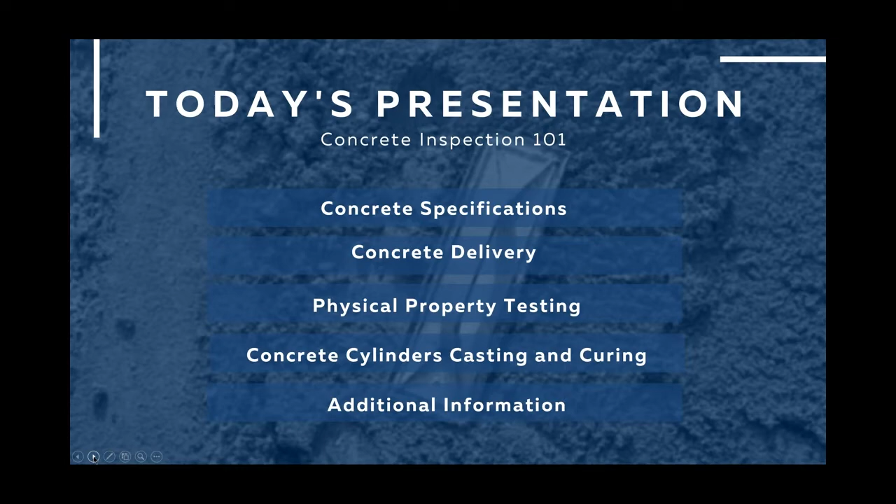So first we're going to start with concrete specifications. Next slide. All right, so just a little highlight: El Paso County follows CDOT, which is more of a performance-based mix, where the mix can be done however, it just has to have the desired results. Whereas the City of Colorado Springs follows more prescriptive style concrete, which means we put together how we want the mix to go and accept the results as they are done. Next slide.

So if you're doing work in El Paso County, you utilize CDOT's approved mix designs list, which can be found on CDOT's webpage. Predominantly, you would use a Class D or P mix for paving, structures, curb and gutter, etc. And then there's a BZ mix that you would use for drilled piers.

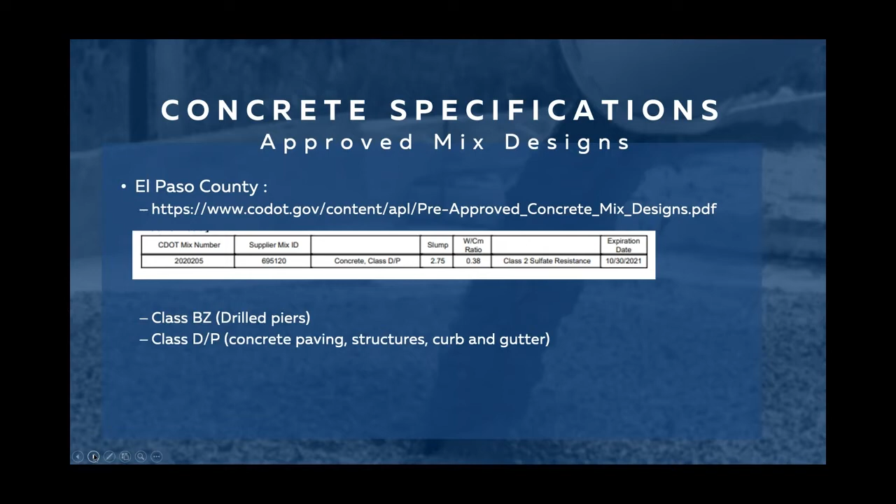The City of Colorado Springs, for almost everything you do, you would be utilizing our approved mix designs, which are available on our website. In general, it's just called the City Mix. That is available on the website if you guys need it.

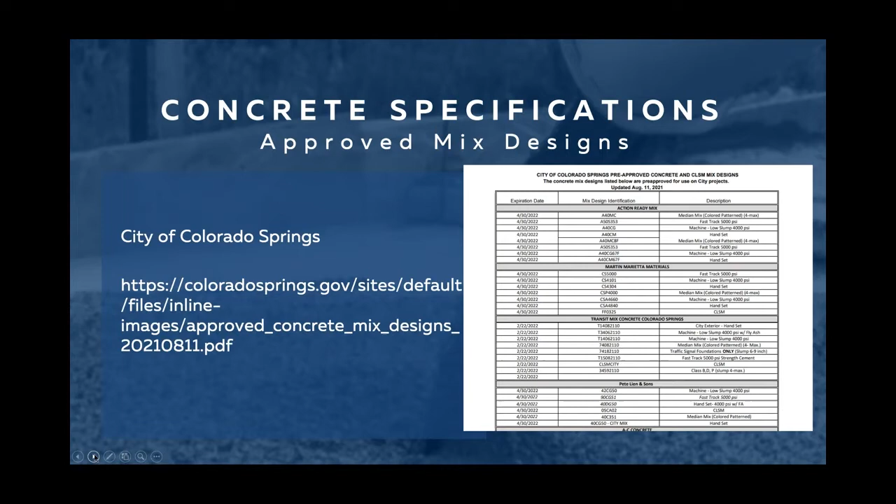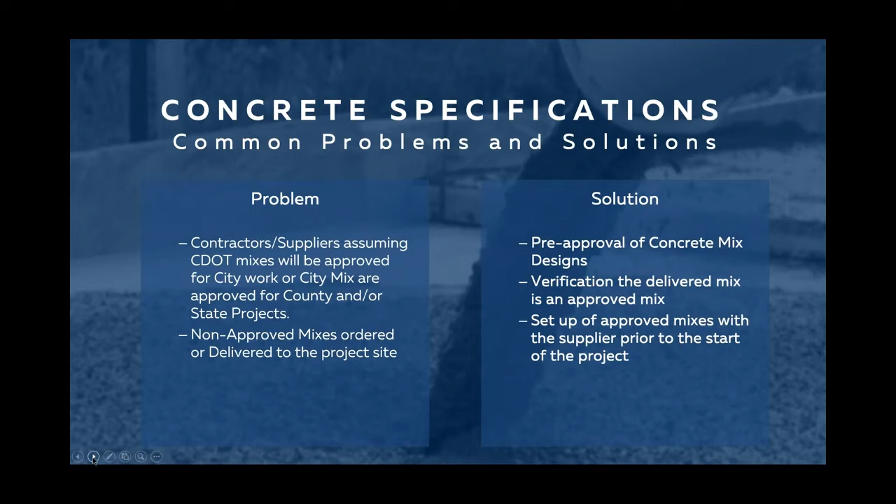Common problems and solutions: oftentimes we have problems with contractors or suppliers assuming that the mix can be used for whichever job site, often confusing city and county mixes, especially near the borders. Sometimes contractors or suppliers provide the incorrect mix for the job. So it's really important to make sure you know what the pre-approved mixes are for your project, verify what is being delivered, and take a moment to set up with the contractor and the supplier to confirm what mix should be delivered to the job site.

And with that, I think it goes to Jason for concrete delivery.

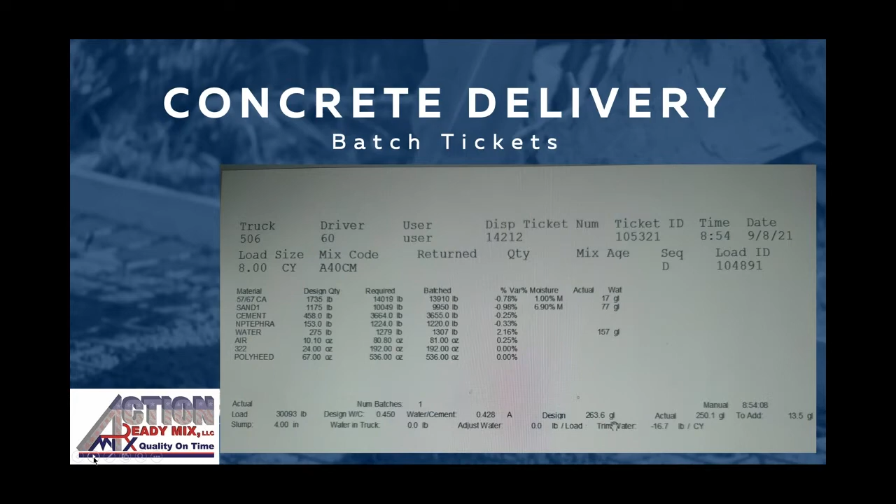So I believe it goes next to Pete Lien. Yes, good morning, this is Joe Grego. I just wanted to address basics, again similar to Jason.

If you look at the left side of the screen, the batch ticket information highlighted in yellow, starting from the top working down, you have your ticket information, your batch time, the date the load was requested, the slump it was requested at, the truck number, and below that the amount of yards in quantity per load, a brief description of the mix design, and to the right of that the product code 40C351, which is the actual mix design that is going to be placed for that day.

On the right side of the screen, that's our batch weights, which are on the back of the ticket. The top line summarizes the truck number, the time it was batched, and the date it was delivered. The second line is the amount of yards being delivered, and then the mix code to the right of that. The key important number is in the fourth column, highlighted in yellow, which is the cementitious material, and they will use that along with the actual number at the bottom where it says actual, highlighted in yellow, 149.6 gallons.

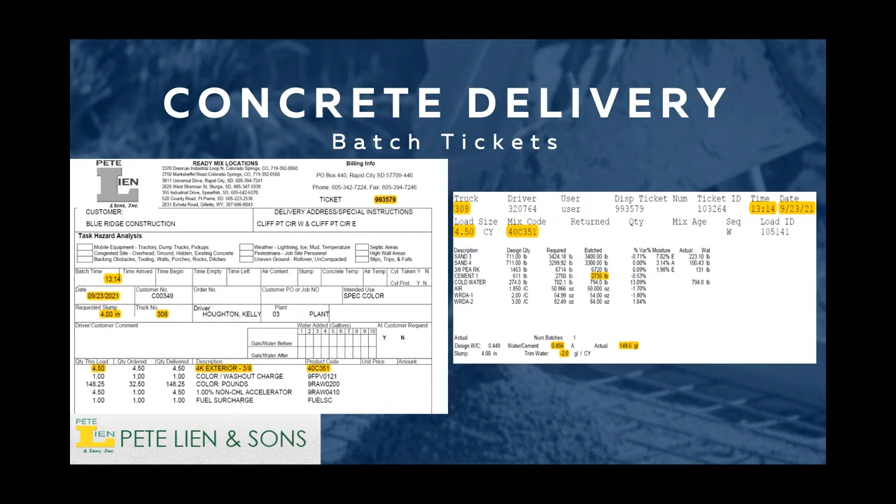They can use that to verify the water cement ratio, which is located to the left of that on our ticket, which we place for everyone's convenience to make it easier to use. And with that, I think I will go to the next slide and turn it over to Don. Thanks, Joe.

So what you're looking at here is a pretty standard Martin Marietta batch ticket.

One thing to note is that batch weights are not automatically printed on the tickets and are typically printed upon request. In the event that you've forgotten, or down the road you want to see them, you can always request them from your sales representative or the dispatch.

Going over the ticket, starting at the top, it's not highlighted, but it is important that you verify that you are the correct customer, of course this one being RME.

As we move down the ticket, you see your mix code, in this case being ZA4115SP, and a brief description, 4,500 PSI exterior. Further down, you see it's a 10 cubic yard load of concrete. This customer ordered 110 yards, and we've at this time delivered 100 cubic yards. The slump at the tail end of the left side says what was ordered is a 6.5 inch slump.

As you look at the batch weights on the right, you'll see a list of all the components in the truck. The key thing to take away is the highlighted portion saying water to add, in this case 12.1 gallons. This is the water you're able to add to the truck and still be within the design water to cement ratio. If you dig into the ticket more, you'll see the variance column. Those are determined by C94.

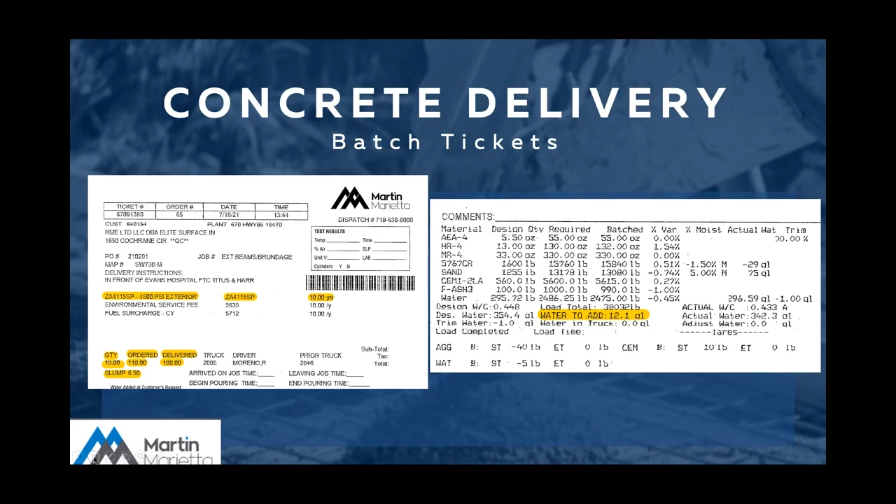We have a pretty tight window on what we can actually put in the truck, and the tolerances are there. Further right, you'll see the actual water cement ratio at the top, being 0.433. With that, we will proceed. Thank you.

Nina, who's our next speaker? Sorry about that, I was still up. Sorry, I was muted and couldn't unmute myself until I got out of presentation mode. The next speaker is Matt. Yes, sorry Nina, I was also muted still. I'm Matt Schaefer with Transit Mix.

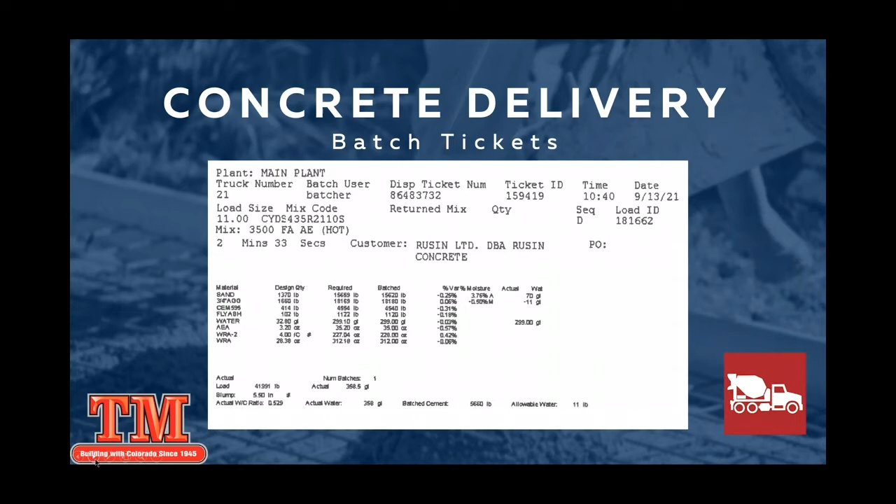Next slide, please. Let's run through some quick numbers, using the numbers from that previous batch ticket. If we had cement at 4,540 pounds and fly ash of 1,120 pounds, our total cementitious would be 5,660 pounds. Going back to that previous batch ticket, we had 299 gallons of water, which is 2,491 pounds.

We had free water, and if you remember, we had 70 gallons of water associated with our wet sand, and we took 11 gallons of water out that was associated with our absorptive aggregate. That left us 483 pounds of what's known as free water. That total water content in this mix would be 2,974 pounds.

When we look at our total cementitious content, just to differentiate, the top slide says water cement ratio. When we start adding natural pozzolans or silica fume or fly ash, those type of components, you go from a water cement ratio to a water cementitious ratio. So our total water cementitious ratio would be our 2,974 pounds of water divided by that total cementitious of 5,660 pounds, leaving us a water cement ratio of 0.53.

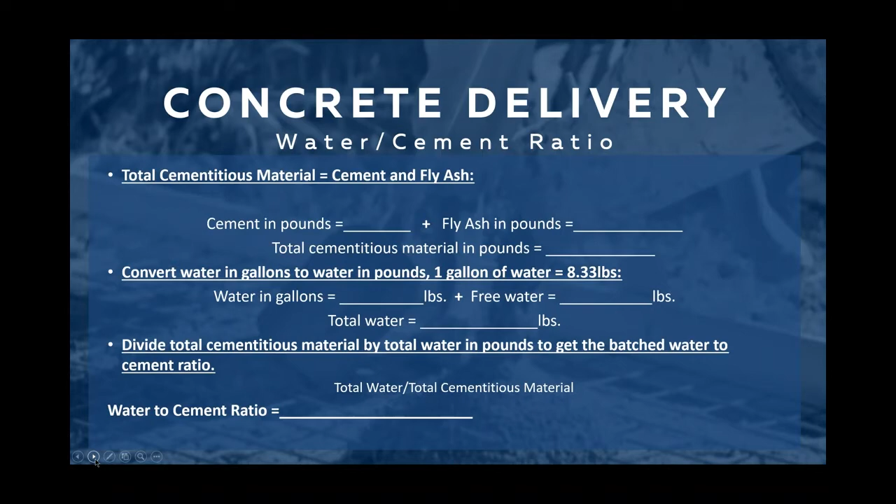Thanks, Mac. Okay, so here we're going to be going over concrete delivery in general, dealing with some of the components on the truck that need to be paid attention to once the concrete's delivered. If there's to be addition of water once the truck hits the site, you need to adjust slump, and pay attention to revolution counts, and any other truck concerns you may want to keep your eyes out for when the truck shows up on site.

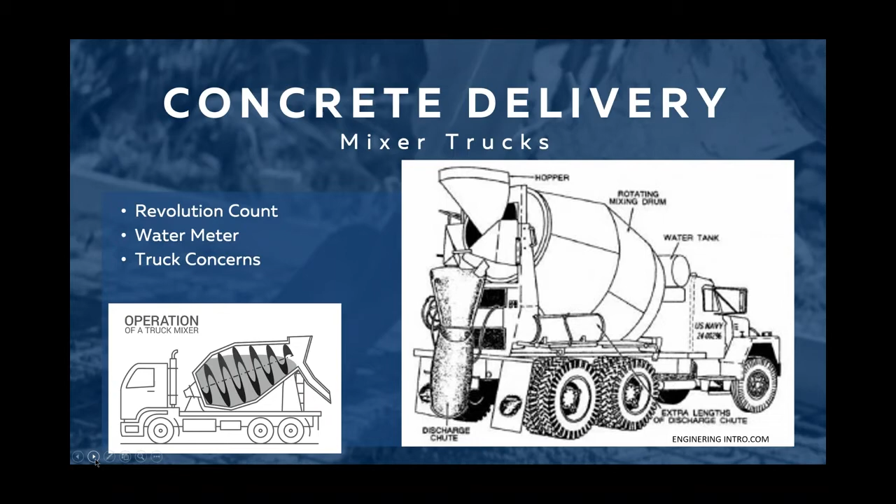Upon delivery, you want to see about 70 to 100 revolutions. You want to look at that to be ensured that the load wasn't beat up on the way to the job and heat up, so that it doesn't start hydrating too fast on you.

Anytime there's an addition of admixture or water, there should be a minimum of 30 revolutions on that mix after that addition to make sure the homogeneous mixture is attained and the air and water is allowed to mix completely through the entire load. You don't want to add water and put 10 revs on it, because then you'll see the top end of that load will be wetter than the tail end of that load.

And as far as end of placement, you don't want to exceed 300 revolutions. That's based off of ASTM and ACI standards. Next slide, please.

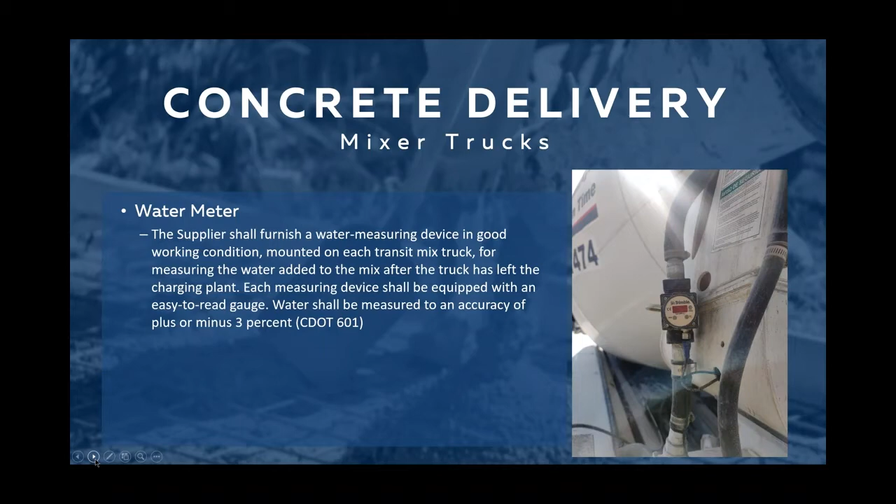Next slide. And then one big thing with delivery, as far as mixing, I know with our plant, we run dry batch plants, and this is extremely important for us, but still important for even central batch plants, is the cleanliness of the drum on the inside, the buildup on the fins. Those fins are meant to mix that concrete and get it uniform and homogeneous and make sure everything is mixed properly and you don't have any segregation.

If you've got a bunch of buildup on those fins, you're going to have several problems, from a uniform mixture when mixing to difficult discharge. And a lot of the times we'll see big cement balls, and that goes back to the mixing. So you want to make sure that if you're adding water or mixing it up and something looks weird, take a look at those fins, or have the driver take a look and make sure they're clean.

Another thing to look out for is the product valves that shoot water into the loads for additional water. Sometimes they'll have a lot of buildup on them and it'll take forever to add water that way, or they'll be leaking. If they're leaking, it could leak water the entire time through the pour or in transit to the job, and that could cause loads to show up too wet.

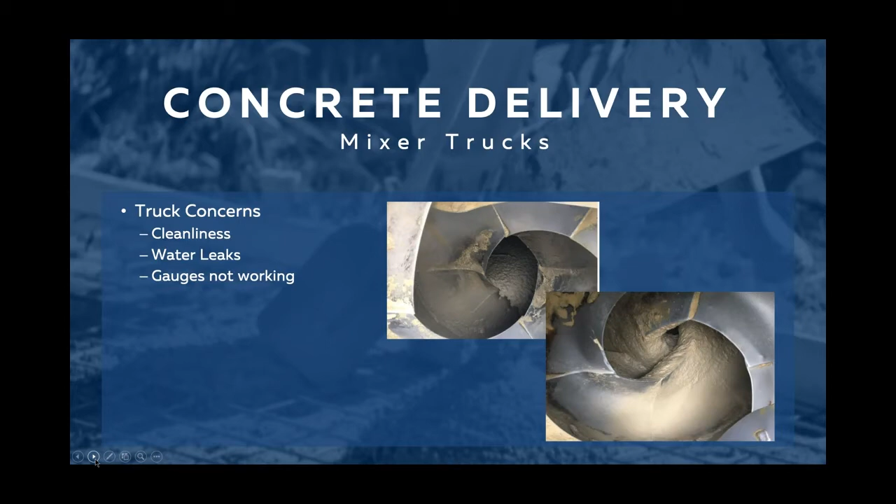Next slide. And then some common problems we see once the truck and load gets on site: no batch weights provided if requested, especially on spec work like city work or CDOT work. If no batch weights are provided, your only option is really to reject the load if the weights can't be supplied in a timely manner.

If there's time left, we've run into some situations where we forget to send the batch weights. Some inspectors will take pictures sent to them of the batch weights, others won't. That's completely up to the inspector on site. Another issue is sending the wrong mix.

Once you verify what mix has been sent to you based off the delivery ticket or the batch weights, if it's the wrong mix or wrong application, reject that load.

Over the time limit, same deal. There's really not much you can do about that. There's a time limit set of 90 minutes.

And if you break that 90-minute barrier, then reject the load as well. Same with over water cement ratio. Once you've broken that water cement ratio, there's concerns of strength, cracking, increased permeability, so you'll go ahead and reject the load as well.

Now, when it comes to low slump, high slump, or high air, low air, adjustments should be allowed on site. Say you've got low air, you need to add air. There should be a one-time adjustment for a retest. If you still don't meet it, then reject the load. High slump and high air, same deal.

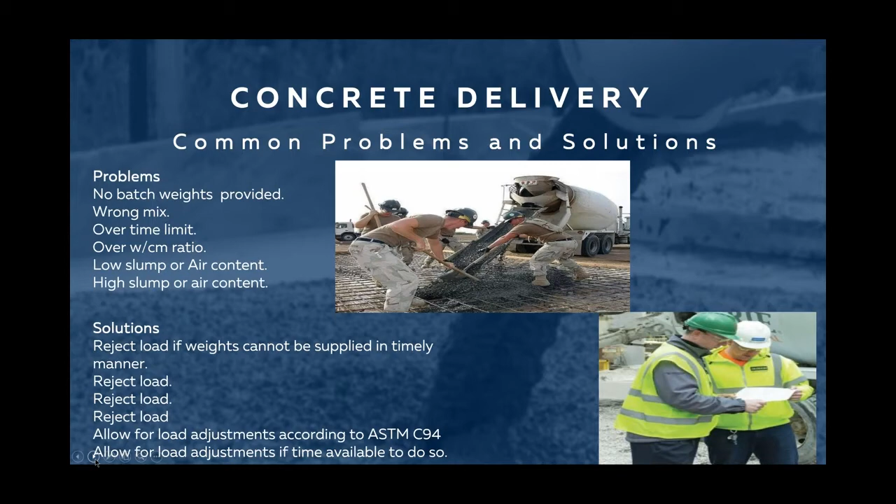I know as a QC person, we have plenty of tricks we can use to try to get that load to come back down where we need to, as long as there's enough available time and you're not breaking that 90-minute time limit. And I think now I turn it over to Don.

We're going to talk a little bit about the physical properties and the testing of concrete now, and I'm going to start with sampling concrete. Next slide, please.

Proper sampling is governed by ASTM C-172. Next slide, please.

Some of the important things about sampling, and probably the most important thing, is if a proper sample isn't collected, and we don't actually have a representative sample of what's being delivered, every other test beyond that becomes invalid. So if we've done things that don't represent the true mix, your air is probably suspect, your slump is suspect, every other test afterwards becomes suspect.

So that being said, how do we get the most representative sample? Because ultimately, every producer in this meeting today wants one thing, and that's an accurate representation and an accurate reporting of what we're delivering to a job site.

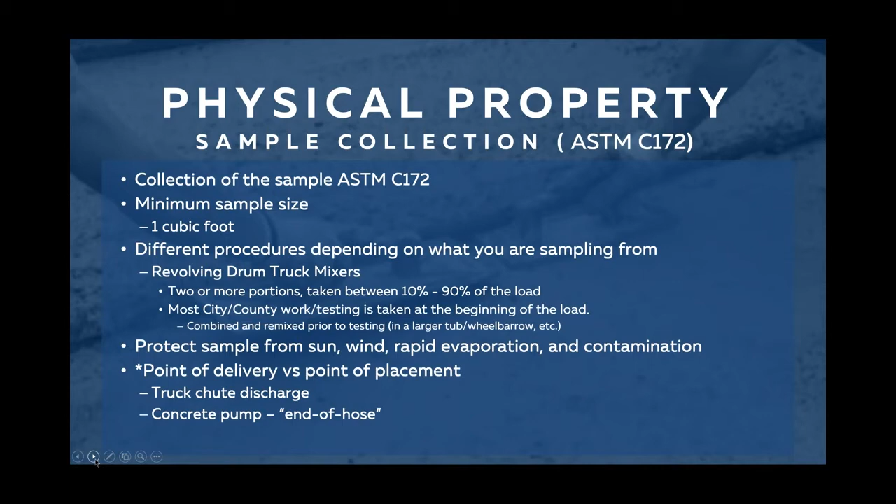Next we're going to talk about temperature. Seems like a pretty straightforward subject. One thing we are seeing more and more of is folks with laser guns or that type of equipment for measuring temperatures. Those are not acceptable for accurate readings for concrete. To get an accurate reading, you have to have at least 3 inches of concrete around the probe on your thermometer, on the bottom and all sides.

So the easiest way to do that, if you've got a receptacle, mound your concrete up so you've got 3 inches on the bottom and all sides. Poke your thermometer down in, then compress the concrete back around that probe so you don't have any air around it. Make sure the thermometer is in there a minimum of 2 minutes, not more than 5, and take your reading and record it while the thermometer is still in the concrete. Don't pull the thermometer out and then take your reading - you need to take it while the thermometer's in the concrete. We report to the closest 1 degree Fahrenheit.

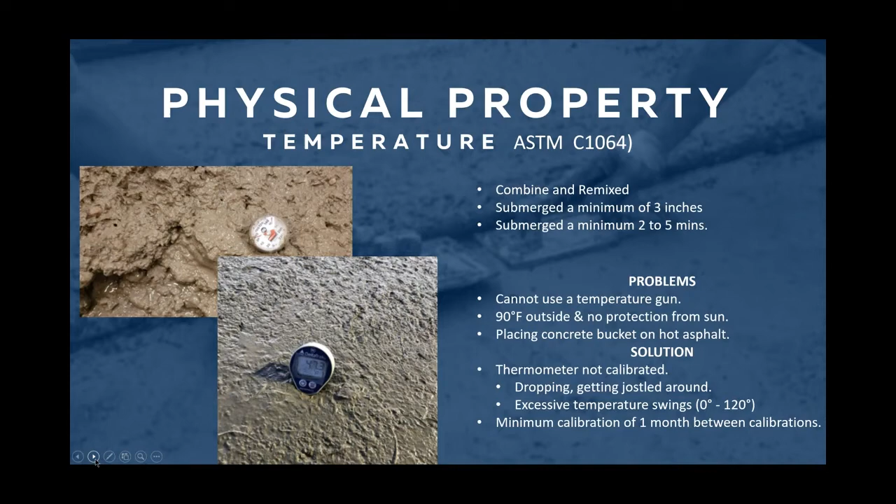Okay, thank you Mac. I think this slide is a video - am I correct, Nina? Yep. And we're going to watch it so we can see how the presentation, the actual test, is supposed to take place.

Here they are taking their thermometer - I apologize, I thought there was audio to this. Should have it embedded at a minimum of 3 inches in. I think our setting got undone, so I'm going to unshare my screen and reshare so we have the audio. Okay, thank you. My apologies to everyone, we do have technical difficulties in this day and age still.

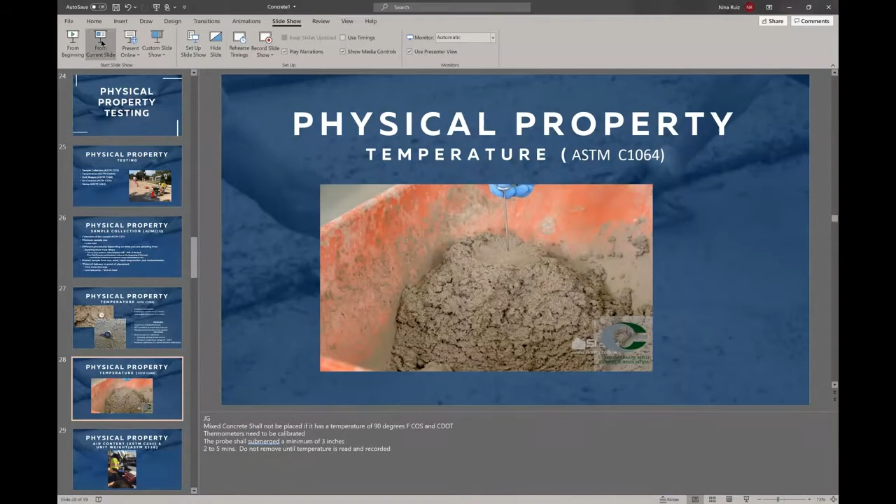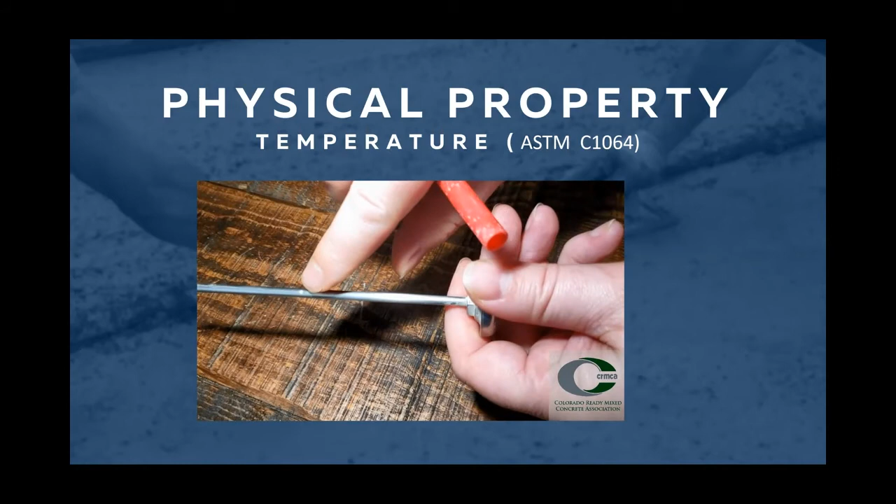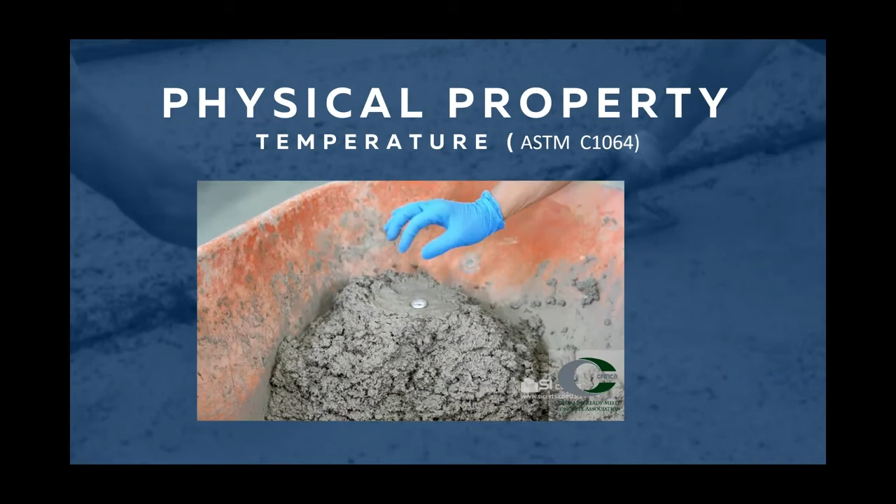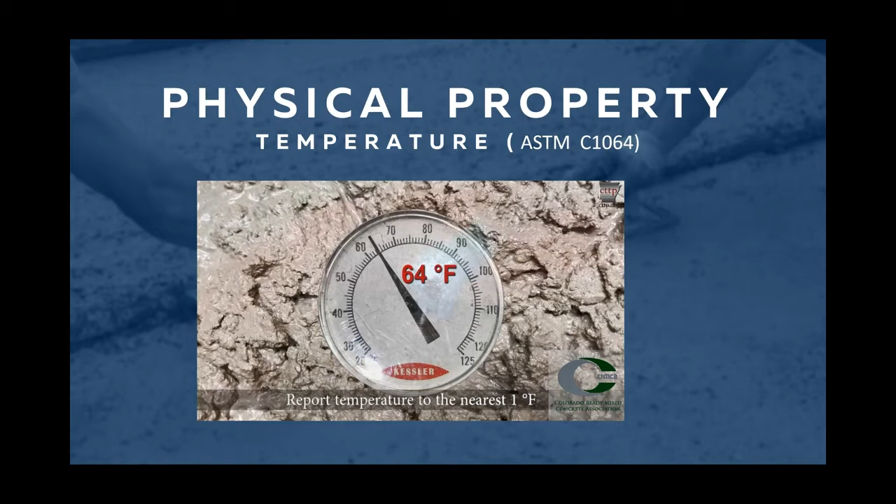Place your thermometer into the sample, making sure there's 3 inches all the way around, including below the probe sensor. Know where the sensor is on your thermometer, as some are at the center of the probe, as shown here by this dimple on the one that I have. Once in the concrete, gently press around the thermometer to close any voids and keep ambient air from influencing the temperature. Leave the thermometer in for 2 to 5 minutes. Once you are ready to read the temperature, just read it - don't take it out, don't twist it, just don't mess with it. After you read the thermometer, remove it and report to the nearest 1 degree Fahrenheit.

Okay, next slide, Nina.

This is just a picture of a young man performing a concrete test. One of the key things we want to address while talking about physical property testing - he's getting ready to do an air content and unit weight test. The same sample of material can be used for both the unit weight test and the air content test. The key things we need to address are that the pot has to be filled in 3 equal lifts. Each lift should be rodded 25 times. Each time they add concrete to the previous lift, they should penetrate approximately 1 inch. They should consolidate each lift, tapping it with a mallet 10 to 15 times. In the event you have concrete that is 1.5 inches or less, sometimes you may have to tap it more than that to get the voids to close.

They should fill the concrete level to just over 1/8 of an inch above the top of the rim of the air pot. The reason they specify 1/8 of an inch is because if you overfill it more than that, you can influence the unit weight by adding more aggregate and cementitious material, and those tend to be heavier, and it can affect your weight by up to 2 or 3 pounds.

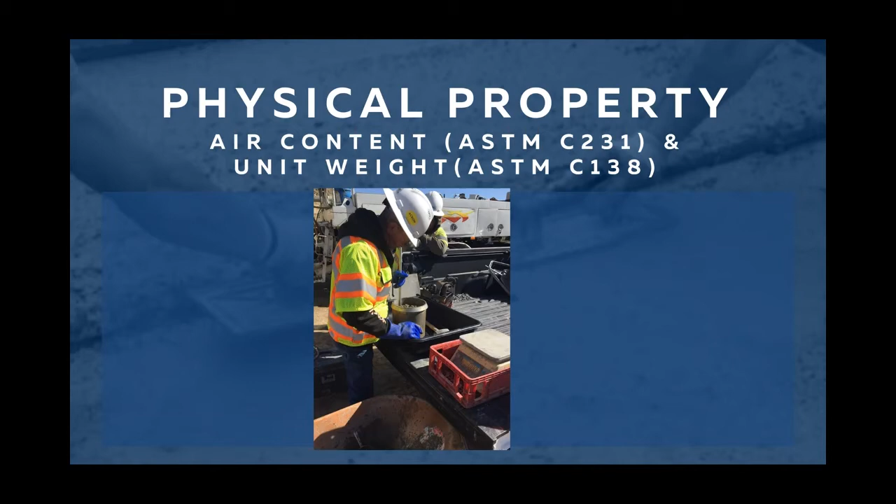If you fill it to that 1/8 inch over, you remove the concrete with a strike-off plate, following the proper ASTM procedures, to make it flat. We'll show you that in the next couple of slides. You clean the rim to create a watertight seal, you weigh the sample, and then you perform the air test. If we can go to the next slide, Nina.

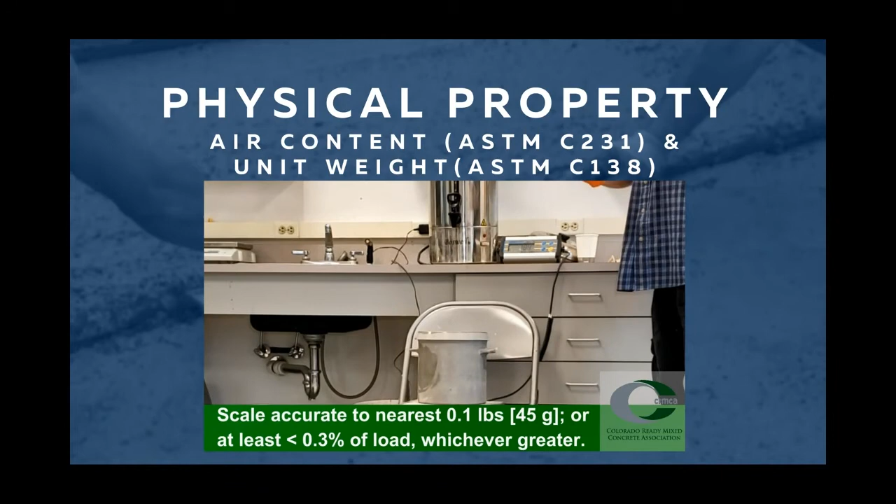Here's a video of the procedures I just talked about. Weigh your pot. The scale should be set on a flat, level, firm surface. Place the pot on a level, flat, firm surface and fill in 3 equal volumes.

Fill the first lift about 1/3 of the volume. Rod the first lift 25 times, uniformly across the surface cross section. Tap the sides 10 to 15 times with a mallet to release the air pockets and close the tamping rod voids.

The second lift gets filled to 2/3 of the volume. Rod again 25 times across the surface cross section, penetrating into the first layer about 1 inch without stirring. Then tap all the sides of the pot a total of 10 to 15 times smartly.

Fill the third and final layer the last 1/3 of the volume. Avoid overfilling. Rod the final lift 25 times, again across the surface area and penetrating the previous second layer only 1 inch without stirring. Tap all the sides of the pot 10 to 15 times smartly, again to close the voids.

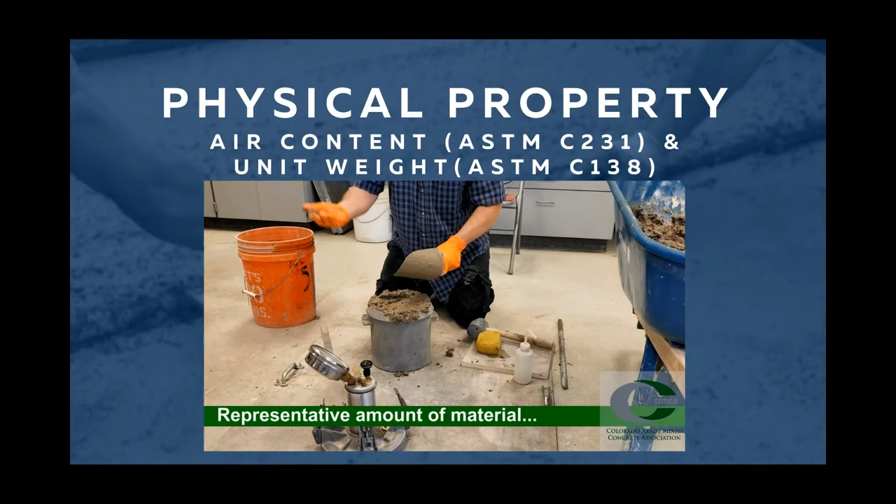A representative amount of material can be added or removed at this time to reach the optimal level. Additional rodding or tapping should not be performed after adding or removing the material. Using the strike-off plate, the top surface should be finished smoothly.

Press the plate flat onto the pot to cover 2/3 of the top surface. In a zigzag pattern, pull the plate towards you until the entire plate is off the pot, keeping the plate flat the entire time.

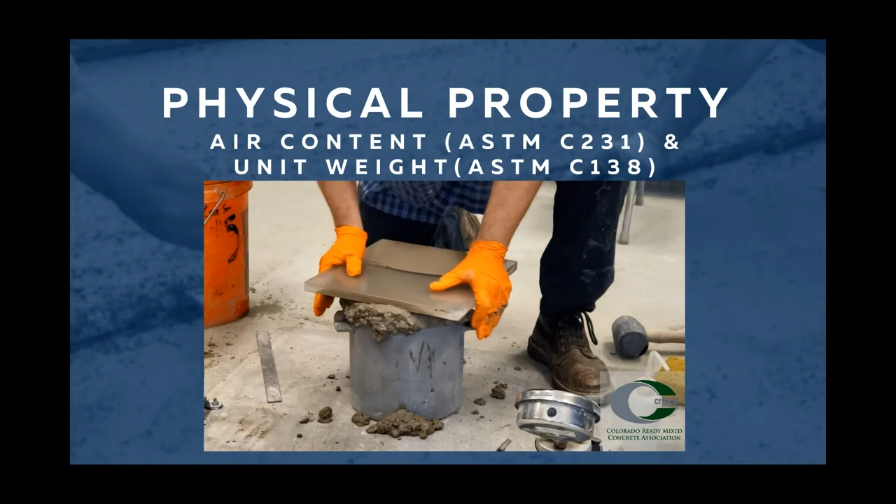Then place the plate to the original spot covering 2/3 of the top surface, and again in a zigzag pattern, push the plate away from you until the entire plate crosses the surface, keeping it flat again. Then incline the plate and strike off the surface from one end to another several times.

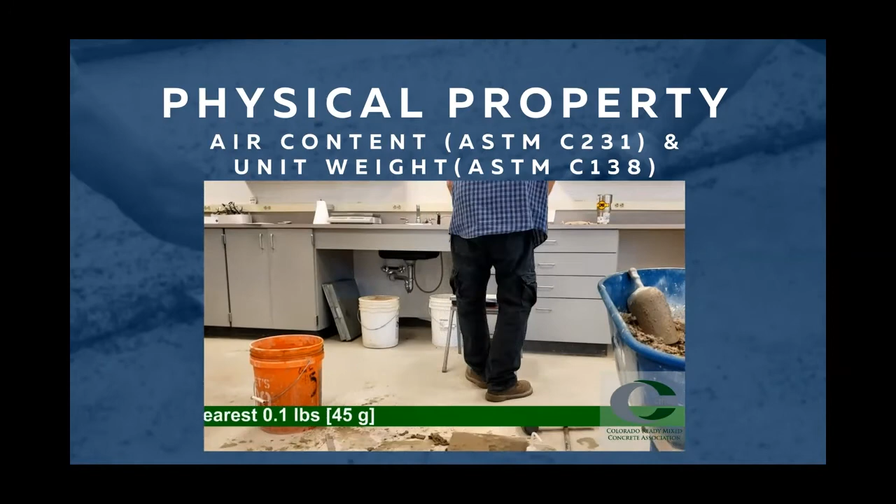Finally, make sure to clean off the exterior of the pot entirely, along the edge of the rim, around the handles if they're there, and the sides and along the bottom edge of the pot. Once clean, weigh the pot full and calculate the density to the nearest 0.1 pounds per cubic foot.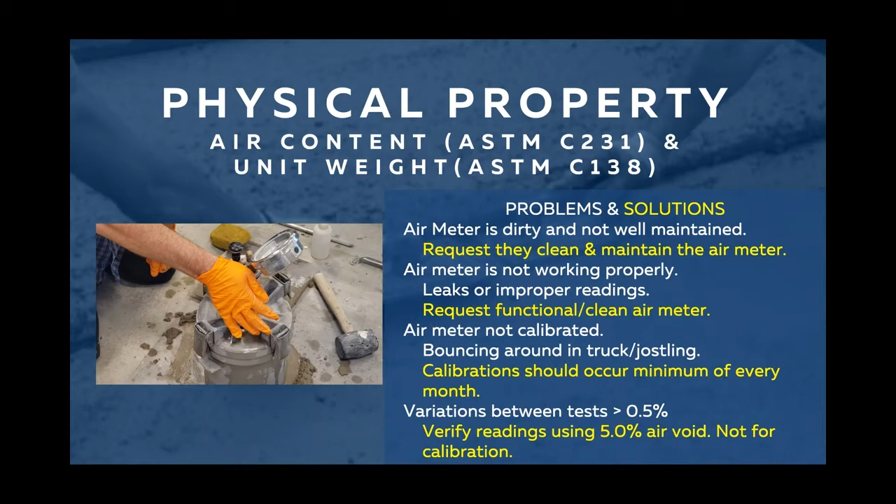Next slide, Nate. I believe this is a video as well.

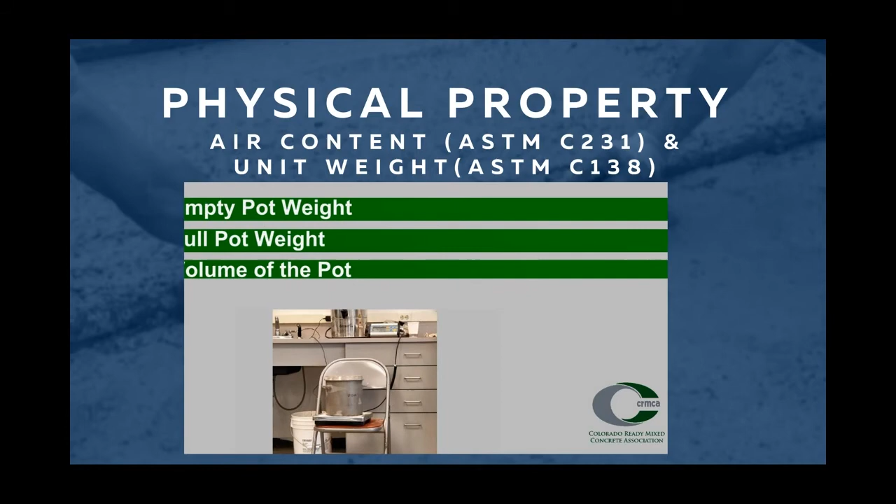To determine the density of the concrete, you must have the empty pot weight, the full pot weight, and the volume of the pot. The volume of the pot is determined through calibration, which we won't go over in this video, which should be recorded to the nearest thousandth.

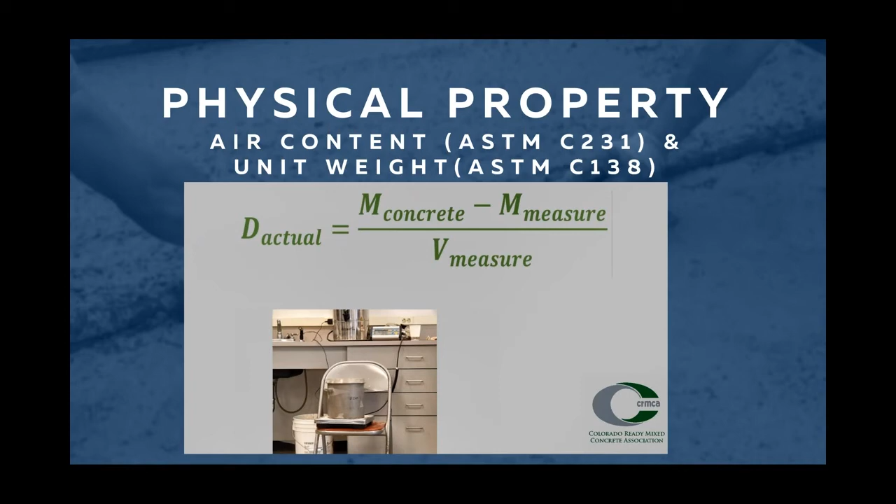Subtract the empty pot weight from the full pot weight to determine the weight of the concrete. Then divide by the volume of the pot. This results in the density of the concrete, which for a standard concrete should be between 135 and 160 pounds per cubic foot.

Using the batch ticket, the theoretical density can also be determined. Yield is also something that is helpful on site. It is defined as the volume of the concrete produced based on the combined known materials that make it up. The purchaser of the concrete will look for yield to assist in knowing if they are getting the amount of concrete they have ordered.

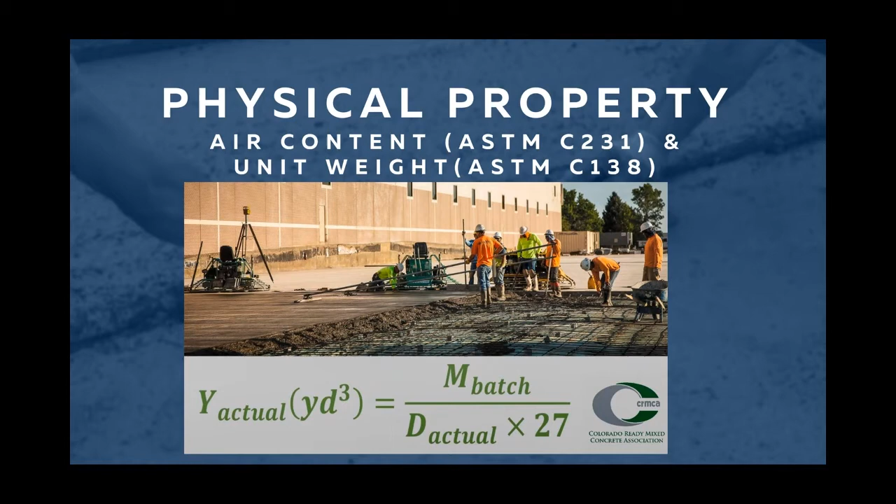Yield is calculated using the weights of all of the materials batched, divided by the density, then divided by 27, resulting in cubic yards.

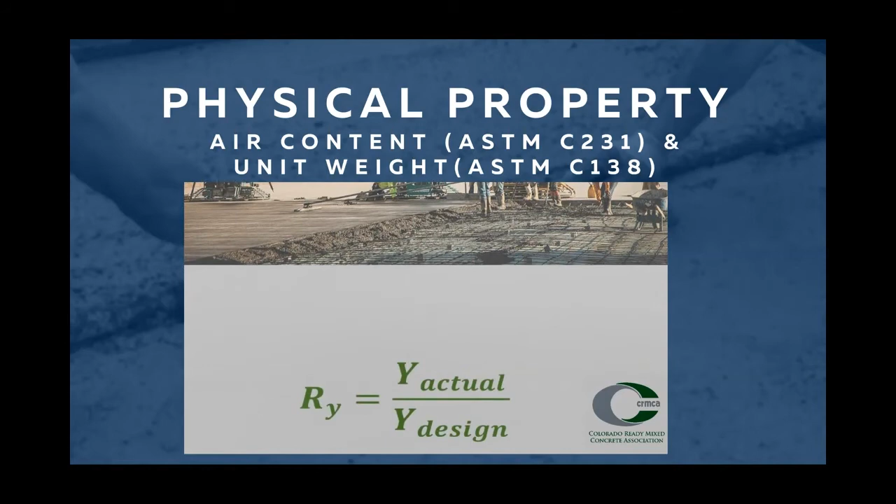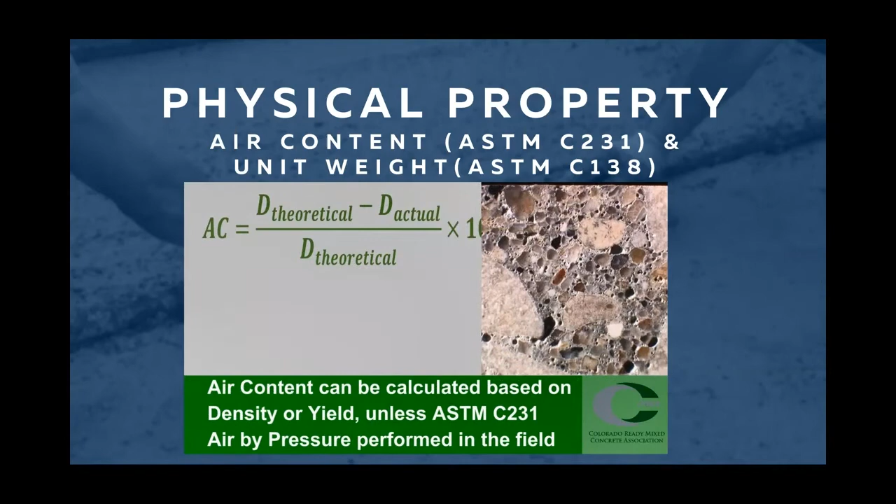Relative yield is the ratio of the actual concrete volume divided by the designed batch volume, or yield divided by design yield. Cement content can be determined based on the batch cement weights divided by the actual volume, or yield. Gravimetric air content can be calculated either theoretically or using the actual concrete batched.

Okay, next slide, please.

Next slide, please. I think this is a video as well.

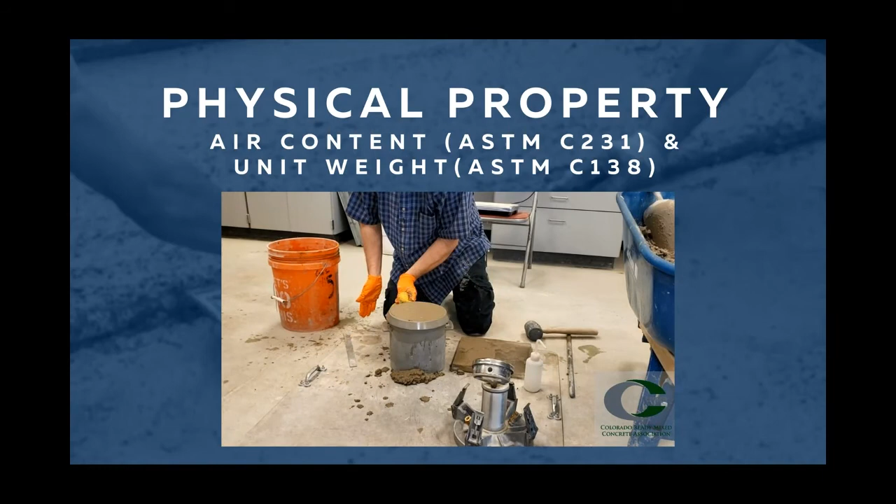Make sure to clean off the exterior of the pot entirely, along the edge of the rim, around the handles if they're there, and the sides and along the bottom edge of the pot. Clean off the rim and the flange of the pot, as well as dampen and clean the cover assembly. Do this even if unit weight was performed to make sure the lip of the pot is clean.

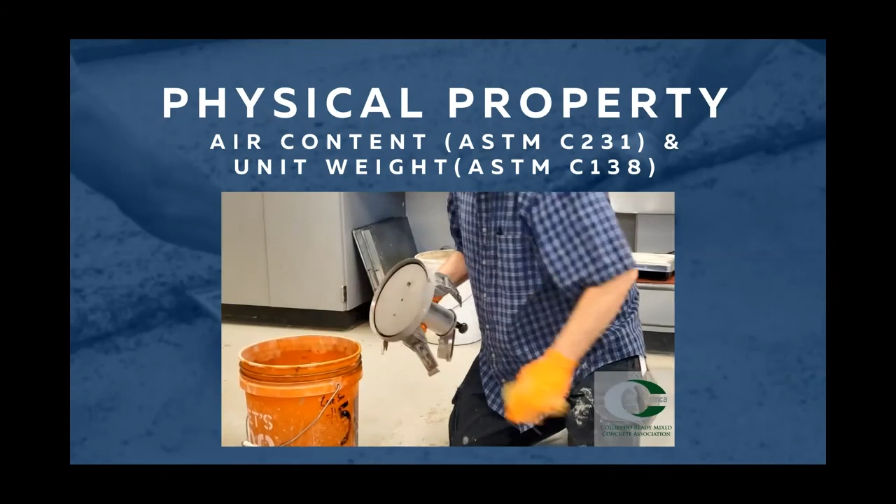Clamp the cover assembly to the pot, making sure you get a tight seal. Make sure the main air valve is closed. In this case, it is a push-pull lever. The petcock should be open.

Then inject water into one of the petcocks, slightly jarring or tipping the pot towards the injection side while filling. This will force the air bubbles out of the opposite petcock. Do not inject water into one petcock, then into the other. Stay on one petcock, otherwise you will continue introducing air and chasing it out by going back and forth.

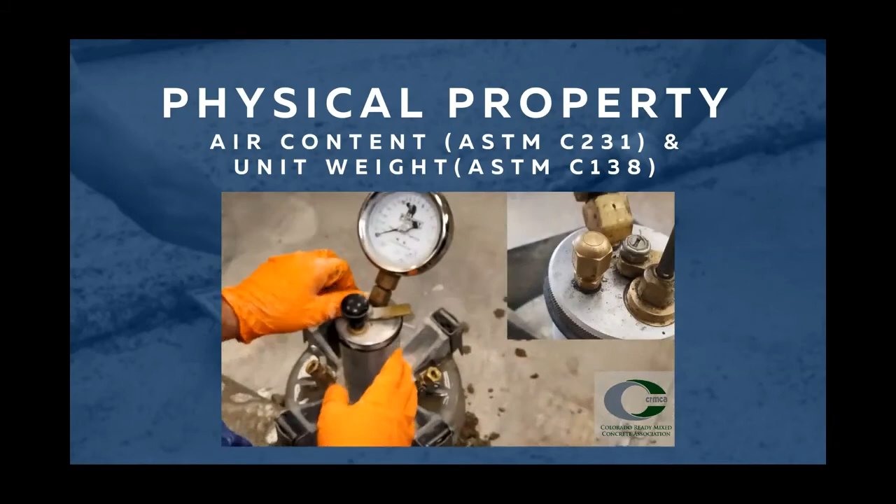Check to make sure the bleeder valve is closed, then begin pumping air into the upper chamber until the gauge is at the correct initial pressure. The petcocks need to stay open during this process, as air will exit from them while pumping if there's a leak at the cover assembly closing pin.

Once near the initial pressure, tap the back of the gauge a few times while letting the compressed air cool and equalize. Adjust and stabilize the gauge hand at the initial pressure by slightly bleeding or pumping while tapping the back of the gauge.

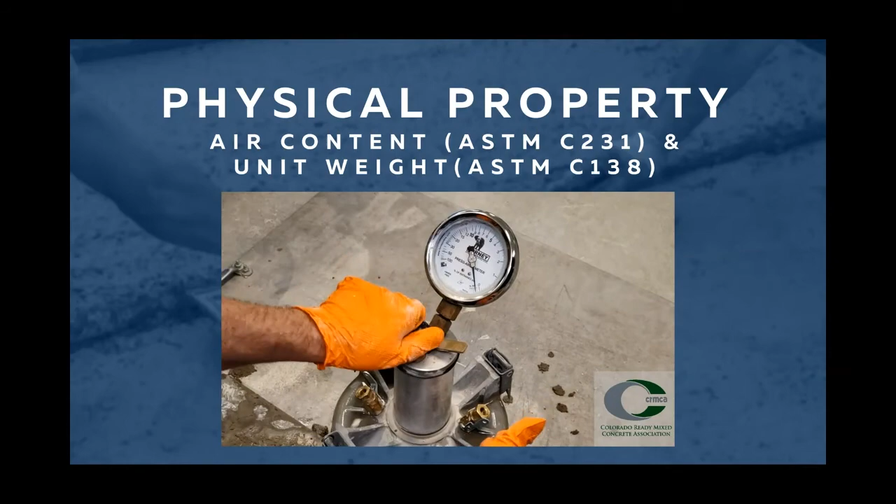Now close the petcocks. Open and hold the main air valve or the top lever, then immediately tap the sides of the pot smartly. Lightly tap the back of the gauge to stabilize the needle. While still holding the main air valve down, read the air percentage on the dial to the nearest 0.1%.

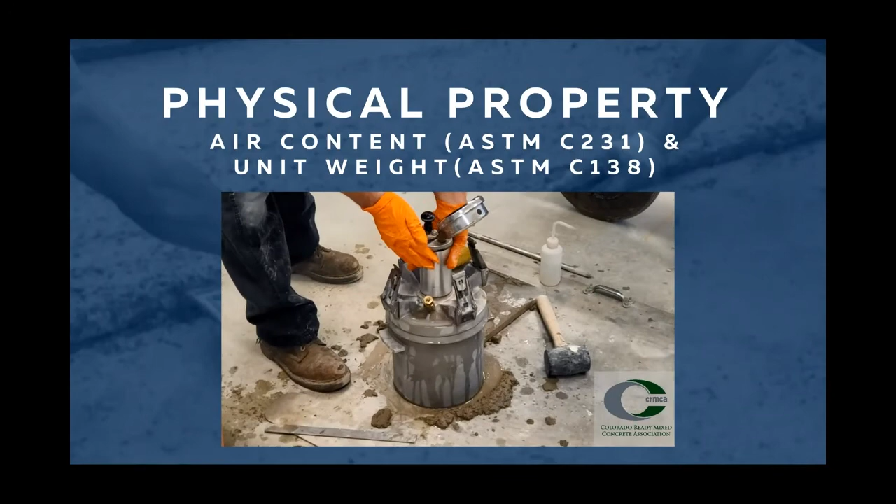Then release the main air valve and release the pressure by opening the petcocks. Remove the cover, then release the pressure in the upper chamber using the main air release valve or the bleeder valve.

Okay, now we're going to talk about the slump. When you're filling the mold, the one thing we should always remember is that before you do your slump, it should be placed on a flat level ground. The equipment should be moistened, with the sponge, so that there's no free water on the rod, the slump cone, and the slump plate. The excess water introduced, if you have free water on the slump plate or the cone, can affect the slump.

The next thing is when they place the slump cone on the plate, they should do it in 3 equal volume lifts. Each lift should be rodded 25 times. Then at the top of the slump cone, they should use a screeding motion of the concrete as they're rolling the rod. So again, screeding plus rolling, that is a valid way to do it.

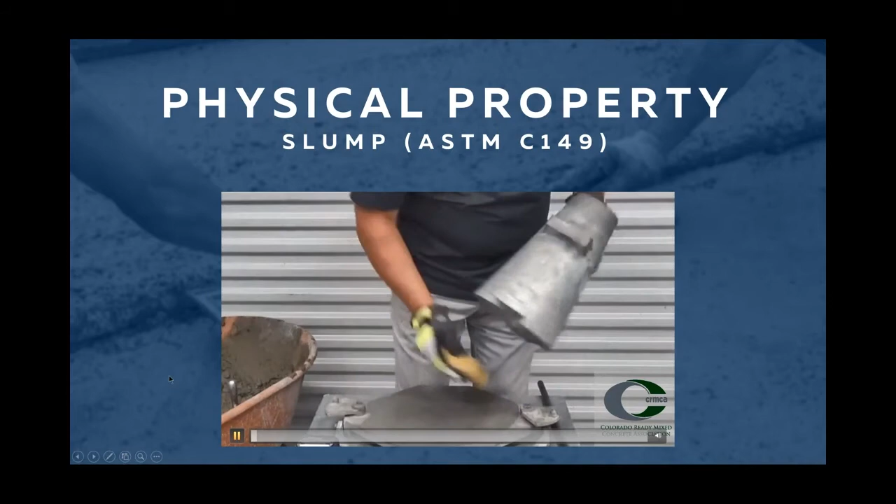I think this is a video that'll summarize the whole test. Use a flat, non-absorbent surface, free of vibration. Dampen your mold and base plate.

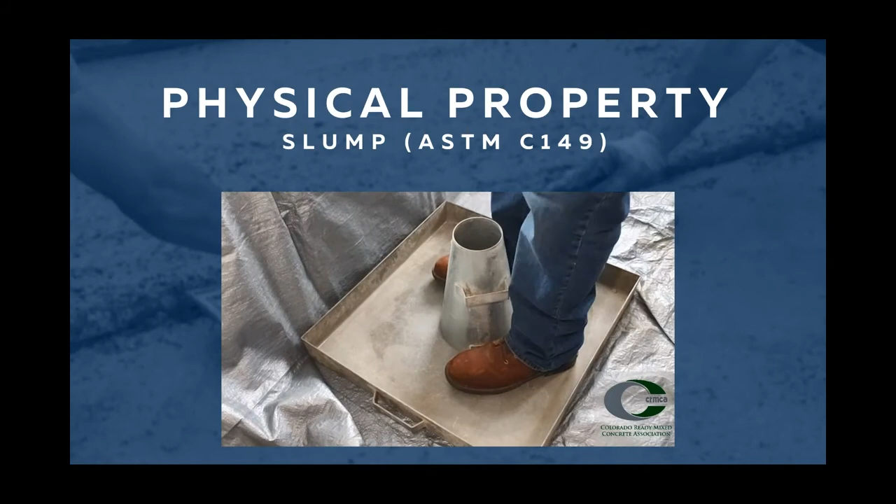There should not be any dripping or excess water on this equipment, which would cause a higher slump than actual. Hold the mold firmly in place by standing on the ears of the cone with the balls of your feet, making sure you don't rock the cone during filling. Using a base plate with clamps is also acceptable.

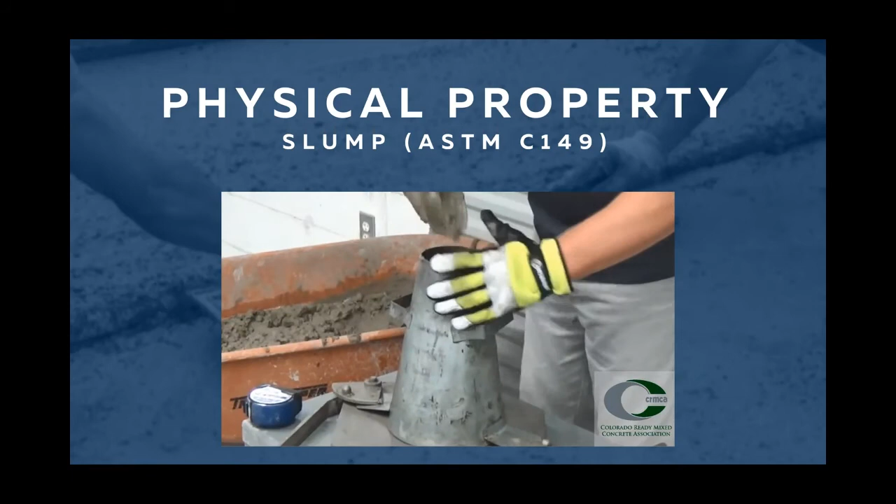Using the scoop, fill the mold in 3 layers. For the first layer, fill to 1/3 of the volume, about 2 5/8 inches up from the bottom of the cone. Rod the layer 25 times through the full depth, inclining the rod slightly, starting from the outside and progressing to the middle with vertical strokes.

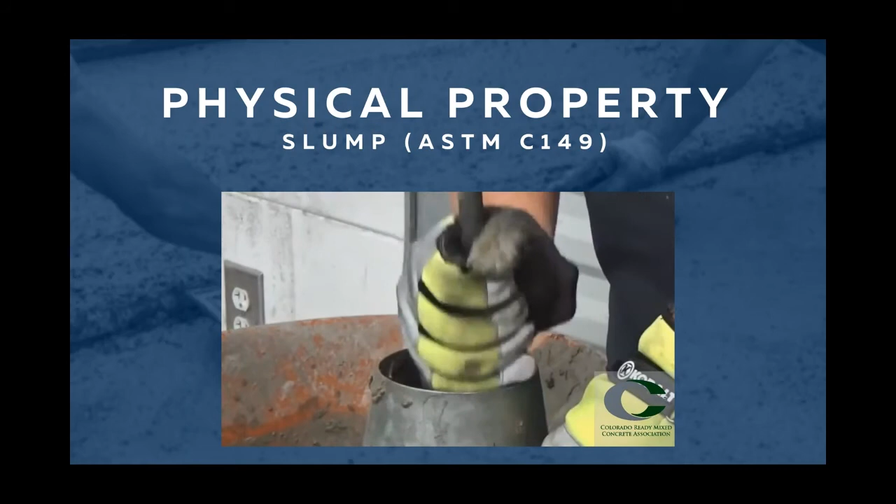The second layer should be filled to about 2/3 of the volume, which is about 6 1/8 inches from the bottom. Rod again 25 times through the full layer, about 1 inch into the first layer, distributing the strokes across the entire area. On the third and final layer, keep the concrete above the top opening of the cone.

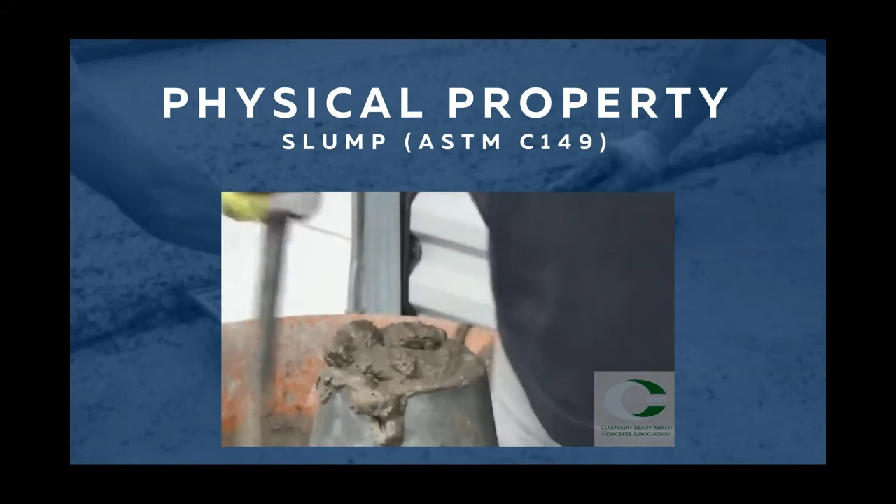Rod the full depth of the layer 25 times, including about 1 inch into the second layer, distributing the strokes across the surface area. During rodding of this final layer, make sure to keep the concrete heaping above the rim of the cone. If you have to stop to refill, continue the count of rodding from where you stopped. If you need to refill multiple times, do so to keep the concrete heaping over the rim.

After finishing the third layer, use the rod to strike off the surface by screeding and rotating the rod across the surface, while still keeping pressure on the cone. Remove any excess concrete from the base of the mold. This does not mean grabbing the sponge and cleaning the concrete.

Lift the mold in a steady vertical motion. The cone should be lifted straight up 12 inches in 5 seconds, plus or minus 2 seconds. Immediately measure the slump. This is the distance between the top of the mold and the original displaced center of the top surface of the concrete.

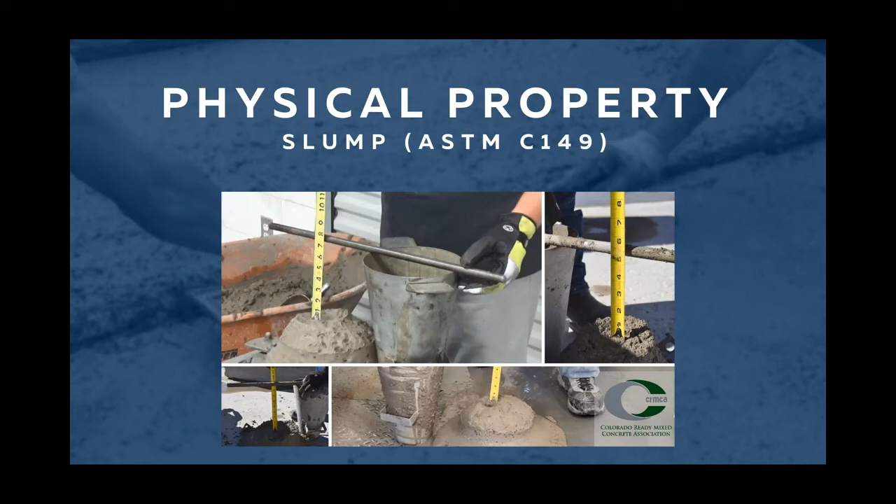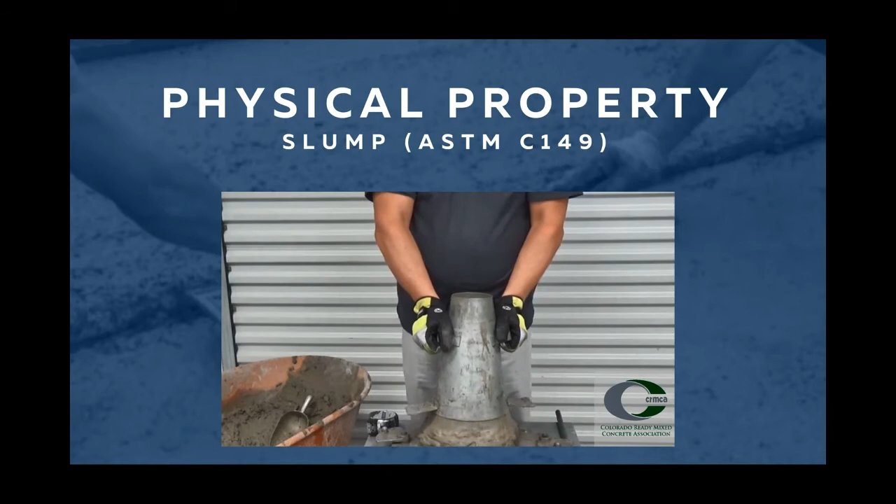If the center of the top surface is lower than the edge of that circle, you do not take an average measurement, but still measure from the center of the surface. The slump test should be complete in no more than 2.5 minutes, starting when the first scoop goes in until the end of the 12-inch lift of the cone. Report the slump to the nearest 1/4 inch.

Okay, now other common problems that we see out on the job site: low air, high air. Those can all be a result of the concrete just not having enough air, having too high air, or the equipment not being in calibration. A good way to address this is to have quality assurance and quality control out on the job site.

The purpose of having the testing lab out on site is so that they test for the city of Colorado Springs. They're not testing for the ready-mix suppliers. So the ready-mix suppliers should have their own representative out on site when they are doing their test, side by side with the quality assurance.

When they do the unit weight and air content, sometimes the tests are not correlating. Oftentimes, if you have a low unit weight of, for example, 33 pounds, but the air content is reading 5%, that's usually what we mean by not correlating, because we're used to seeing a unit weight of roughly around 34.5 when that happens.

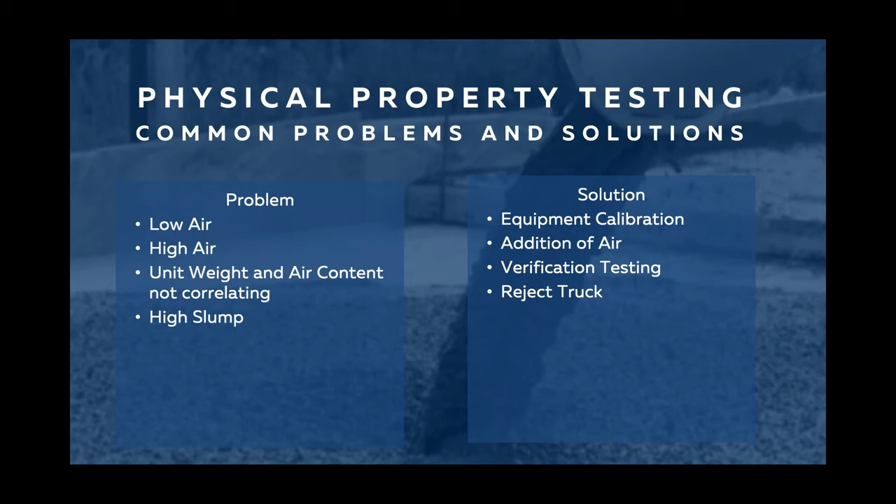There we go, go back one. There we go. We can have low slump or high slump.

City of Colorado Springs has a maximum slump of 4 inches for their 2C and PPRTA projects. Following ASTM procedures, they have a minimum requirement of 2.5 inches. If concrete shows up without a 2.5-inch slump, chances are your air content and workability will be a little low. We strongly urge everyone to make sure that slump is at least 2.5 inches before testing. So we can add water to help increase slump above the 2.5-inch mark. Somewhere between 2.5 and 4 inches is the sweet spot, and that should positively correlate with our air content as well.

We're also talking about high slump. Sometimes we see that. The only solution, if it's exceeded the water demand or water-cement ratio, is to reject the truck. Otherwise the truck can sit there and hope hydration takes place, dries up as we'd say in layman's terms, to get it within that 4-inch slump maximum requirement.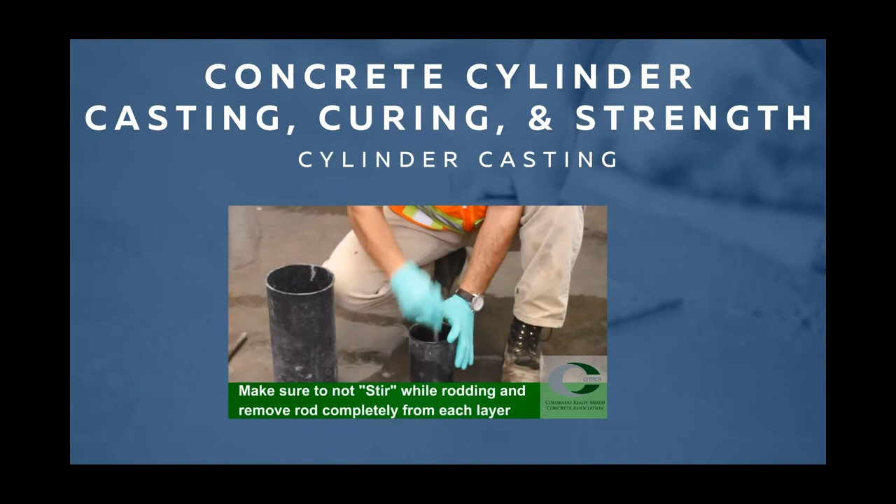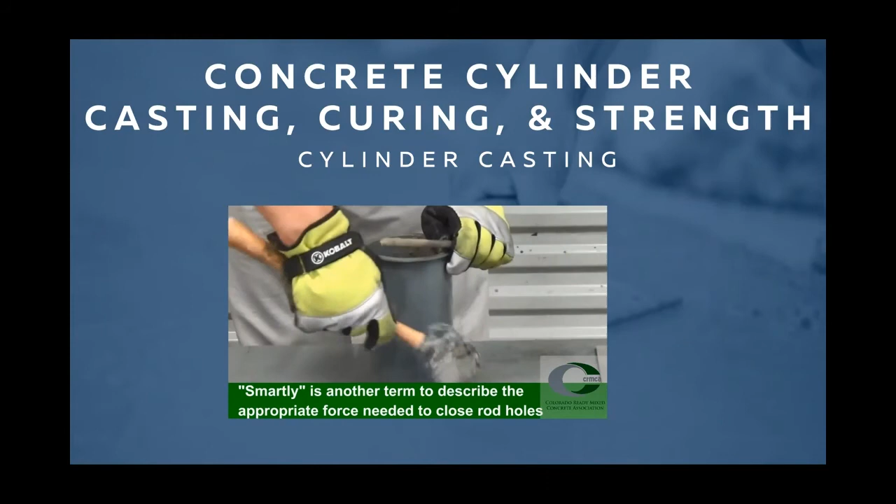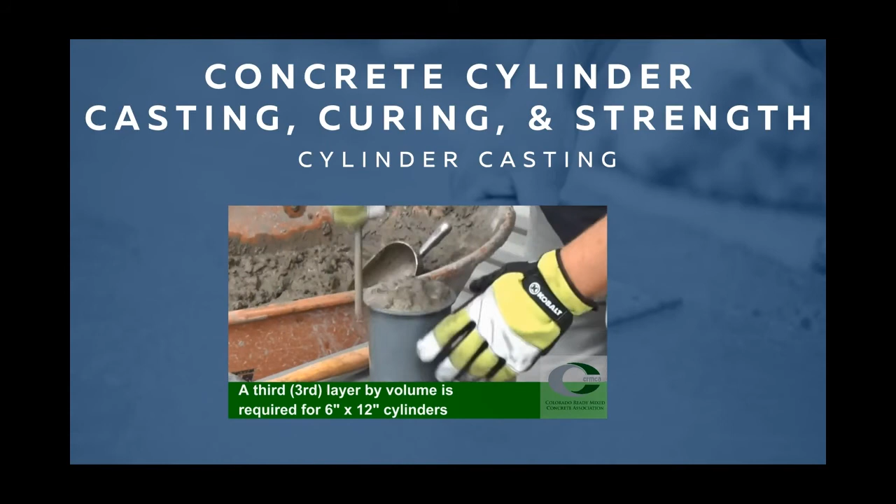Rod the full depth of the lift without damaging the bottom of the cylinder mold. This means you will tap the bottom, but not strike it hard. Then tap the sides of the mold lightly 10 to 15 times with a mallet to close the rodding holes and release trapped air pockets. Repeat the process by filling concrete to the top of the mold. Rod the layer 25 times uniformly, penetrating about 1 inch into the first layer. Tap the sides of the mold 10 to 15 times with a mallet.

Strike off the surface of the mold using a tamping rod when consistency allows for it. A handheld float or trowel can be used alternatively to smooth the surface. Provide protection to prevent moisture loss, using the provided lid or other material if not available. After finishing the cylinder, mark the specimen to identify the concrete it represents: the date, the project, the ticket number, etc. It's more practical to mark the mold before beginning the filling process, and this is fine. Then move the specimen to the initial curing location. Ideally, testing and casting should occur as close to the initial curing location on site.

So you're hearing all of these, rod 25 times, and that's what's great about ASTM—it's created a standardized procedure for everyone to follow. One thing that's difficult with ASTM, though, is that it tends to turn into jumping around different specs to find the whole picture, and C31 is no exception.

Looking into the initial cure state, you have two methods: standard curing and field curing, both done in the field despite the name. Standard curing is what you use for acceptance, to prove the mix meets the specified strength the supplier is required to supply. When standard curing, you're required to keep those cylinders level within 1/4 inch per foot, and keep them in a temperature-controlled area, typically water.

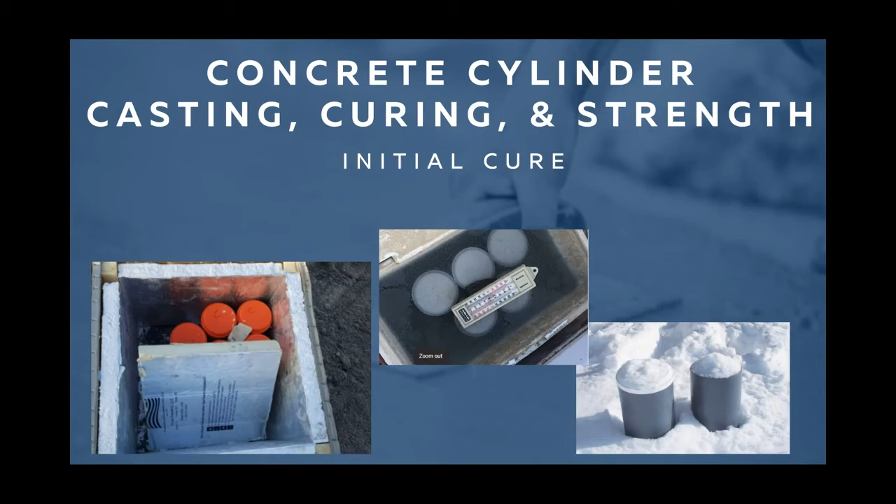So field cured cylinders is probably the more difficult one to actually achieve correctly. ASTM says that if you are field curing, you're doing this to determine if the structure can be put into service. You're going to compare them to standard cured cylinders, but know that there's going to be a difference naturally. So this is going to be like we're opening up a roadway, we're stressing a deck, and we need X PSI to do that. ASTM states that we are to cure these cylinders in as close to the same condition that the structure is being cured, and secondly, as close to the area we tested as possible.

What we know about concrete is that as it hydrates, it generates heat. Heat is what gives us our strength. So when we're looking at field cured cylinders and early strength, and you remove this 4x8 cylinder from the mass heat of the slab, your field cure is always going to come up low. And vice versa, if we put this field cured cylinder in a heated environment, a heated water tank or insulated box, and we don't protect the slab in the same manner, we can get ourselves into some trouble here when we break that cylinder and see that say it's at 3,500 PSI, and we get the green light to stress the deck, but the deck froze and the field cures didn't represent that. Now we may have a blowout or other things that can happen.

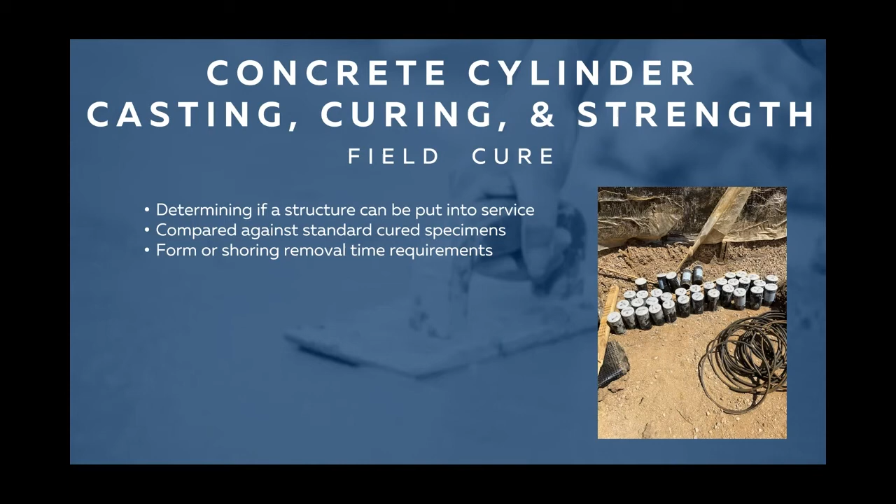Transporting is just as important as making and curing the cylinders properly. You can have the all-star team make the cylinders, but if someone who picks them up doesn't care for them properly, you can do a lot of harm. ASTM says that you need to wait 8 hours after final set. Industry standard is that it's typically the next day, but you are required to do this within 48 hours of that final set time. While you're transporting it, you should protect it with suitable cushioning material to prevent jarring or any jostling around of that cylinder. They're still in a very fragile state after one day, and they can microfracture.

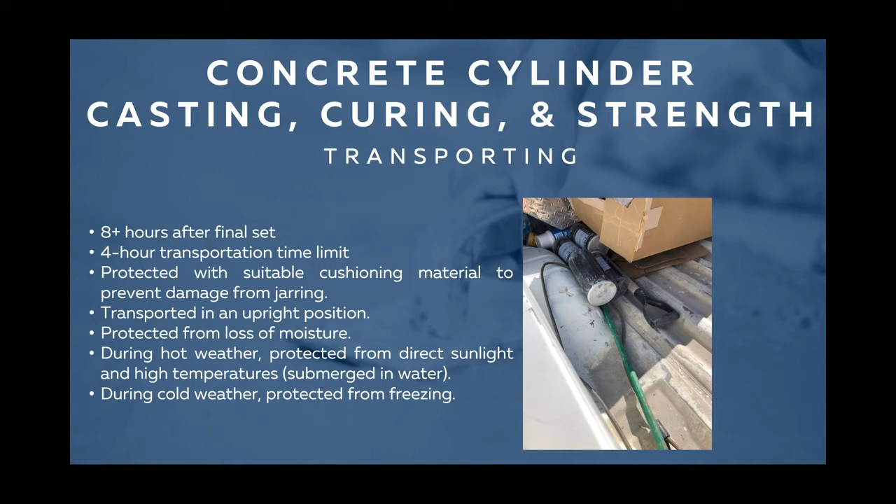Transport them in the upright position, protect them from loss of moisture. Typically this is done with just what you see there with the cap, a watertight lid. And during hot weather, you should protect from direct sunlight, high temperatures, rapid evaporation. ASTM recommends you submerge them in water while you transport them. This is very rarely seen. And during cold weather, you protect them from freezing.

Once they get back to the lab, requirements get a little bit tighter. Within a half hour of them arriving, you're to strip them and cure them with free water on the surface at all times. What we have pictured here is a field lab. This is an absolutely acceptable way to cure these cylinders. Commonly, testing agencies and ready mix suppliers will have a 100% humidity room or a fog room where moisture is getting applied to the total cylinder surface at all times. But the temperature requirements tighten up a little bit, where it's 73.5 degrees Fahrenheit plus or minus 3.5 degrees.

So this is a video of the actual compression of a cylinder. It's actually a great video.

So you see a great explosion. Now what we can't see here is that typically the bottom is what's moving—it's slowly rising up. This is where the quarter inch per foot levelness becomes important, because as you bring these to the lab, you're measuring them with calipers to the nearest hundredth of an inch, and you're using this measurement to determine the surface area of the top of that cylinder, where the load is being applied.

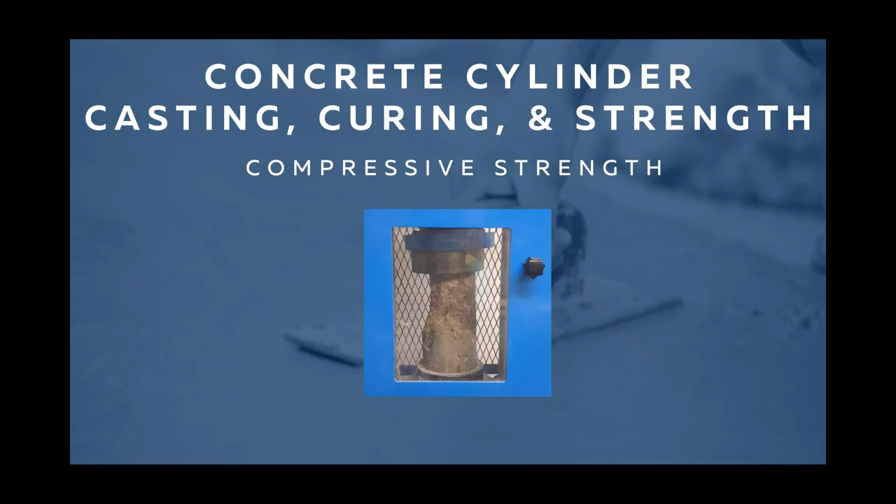Pad caps have become very common, but ASTM C39 recognizes that if we're using a removable cap, you can see a type 5 or 6 fracture, which is when just a corner chips off, either on one end or both ends, being it's type 6. This can happen before ultimate capacity is achieved. ASTM recommends that the technician continue to load that cylinder to verify that it has achieved ultimate capacity.

This gets overlooked, I think, because so many cylinders are sitting there to test—it's hard to give the extra attention to one. So one thing I'd advise is to look for a number of type 5 or 6 fractures on your report, as ASTM does recommend that ultimate capacity may not have been obtained.

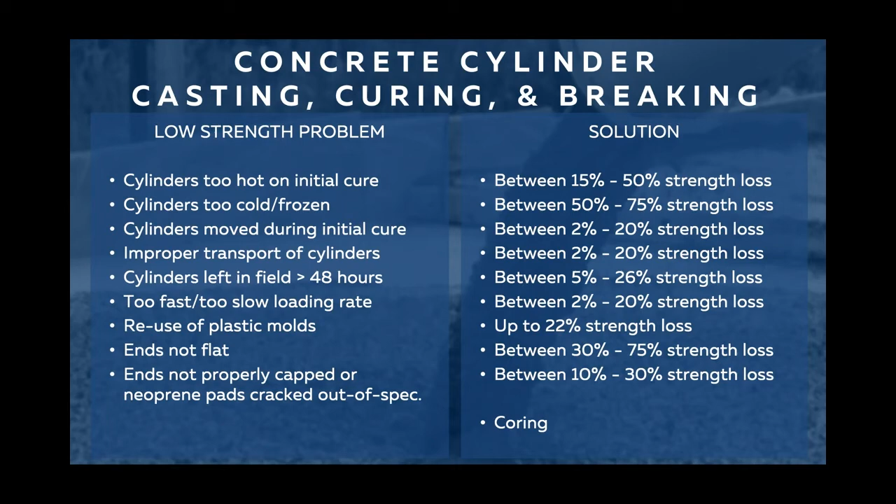Thanks, Don. Try to make this brief, but this is pretty important information here, especially for those of us who've been lucky enough to live in Colorado with the extreme weather we get here, and the issues we've seen with placement of concrete in these extreme weather conditions.

Since we're coming out of the hot weather, we'll dab into that a little bit first here. Hot weather concreting is any combination that may impair the quality of the fresh concrete, whether it be high ambient temperature, low humidity, high wind speed, high concrete temp, or solar radiation.

ACI 301 and 305 actually state a limit of 95 degrees on the concrete, but most specs you'll see will be 90 degrees max. Colorado Springs and CDOT for sure. You have different ways of getting around dealing with the hot weather.

The adverse effects it'll have on the concrete can be managed with the use of hydration stabilizers, which come in handy with the hot weather. And a big issue with hot weather concreting is your plastic shrinkage cracking.

Cold weather concreting, as we know, can't stop construction when winter starts. So you do have to take precautions though. Cold weather concreting is if your ambient air temperature is 40 degrees or lower, or if there's 50 degrees -- I'm sorry, I lost my note here.

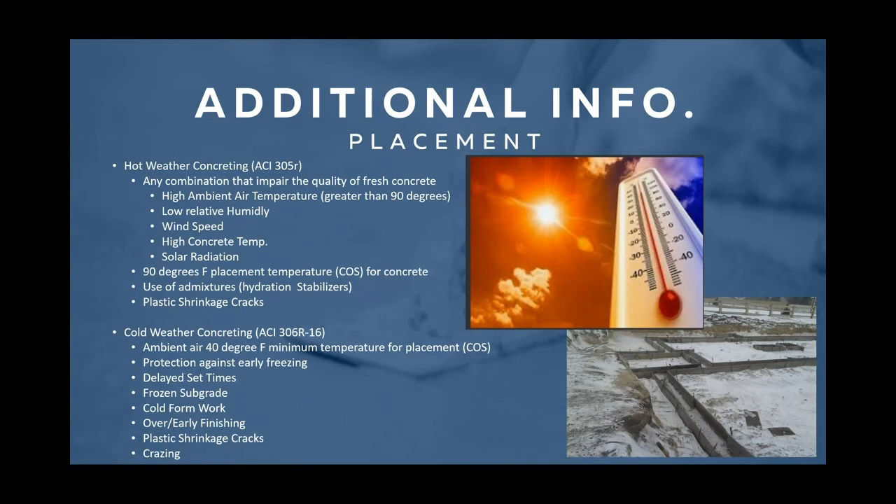But again, things you want to be ready and prepared for in hot weather is your accelerated set times, the increased rapid evaporation of the surface moisture which causes those cracks, increased water demand to obtain your desired slump. And with that, if you have to add more and more water, you're looking at lower strength, increased permeability due to the cracking, and increased potential for plastic drying and shrinkage cracking.

Best way to prevent the shrinkage cracking, which seems to be, in my experience, one of the biggest issues with hot weather, is the use of Confilm or something to keep that surface moisture there while the concrete is setting and the bleeding is taking place. Next slide, please.

Cold weather, we all know we place in it. It's not necessarily fun, but we got to take the proper precautions in order to make sure that the concrete that's put in place doesn't freeze. Especially if it's a structural member and it's going to be load bearing. You don't want that to freeze and potentially cause a failure down the road.

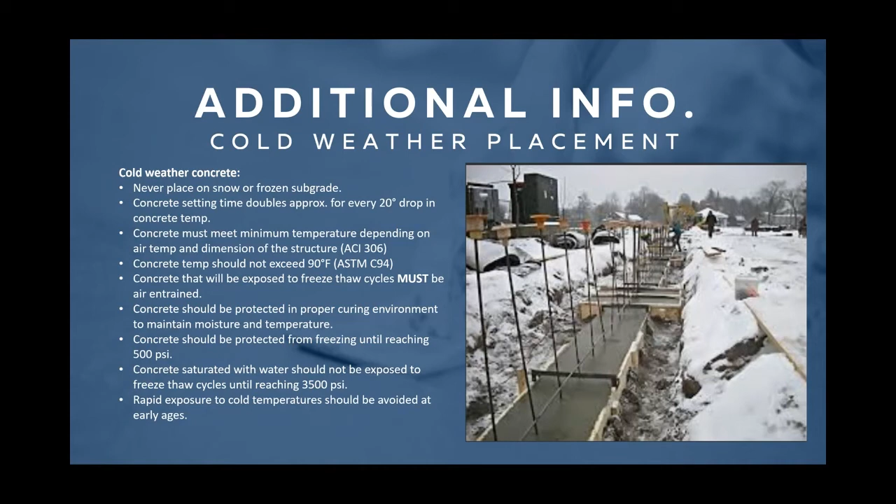And then rapid exposure to cold temperature should be avoided at early ages. You don't want to have a curb and gutter that's cured underneath the blanket, sitting at 75 degrees, and outside it's 15, and you take that off -- you'll have some thermal cracking, that potential that could happen there and completely ruin that. Next slide, please.

And then jointing. Jointing's another big thing. Not only the timing, but the type.

Your isolation joints are going to basically separate anything, a slab that you're pouring, say up against the foundation of a house, or a patio. You want to put in those isolation joints that separate the new concrete from the old structure to allow for the horizontal and vertical movement of that slab as it changes volume as it cures. It should extend the entire depth of the slab so you don't have any part of that slab trying to adhere to the old one and creating cracks.

Your contraction joints, these ones are extremely important. This is kind of more or less just a pre-planned crack. You know concrete's going to crack. It's guaranteed to do two things: get hard and crack. We want to try to tell it where to crack.

So with these contraction joints, you can either tool them or you can saw them. The timing of each: tooling is typically when it's still plastic and during the placing operations. Sawing happens after initial set, or hopefully a little before initial set, but there are timelines set out depending on what kind of saw you're using.

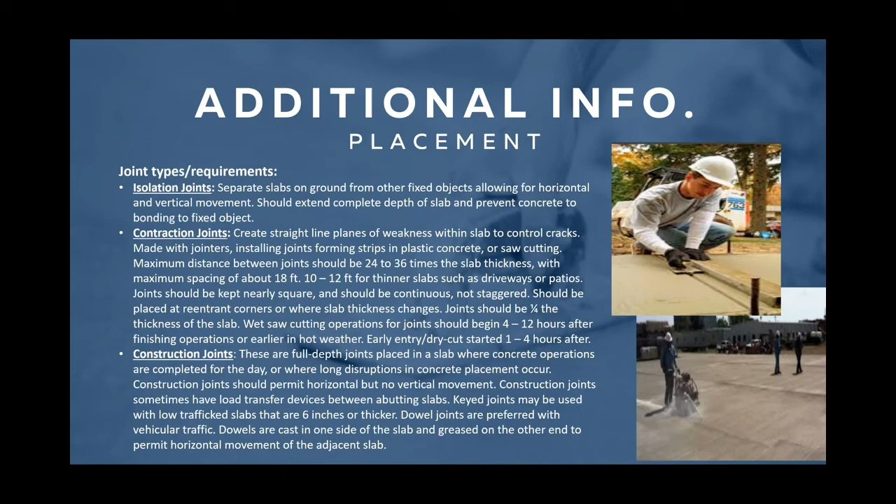I believe this is where Matt takes over. Can you hear me? Yes, we can hear you, Matt.

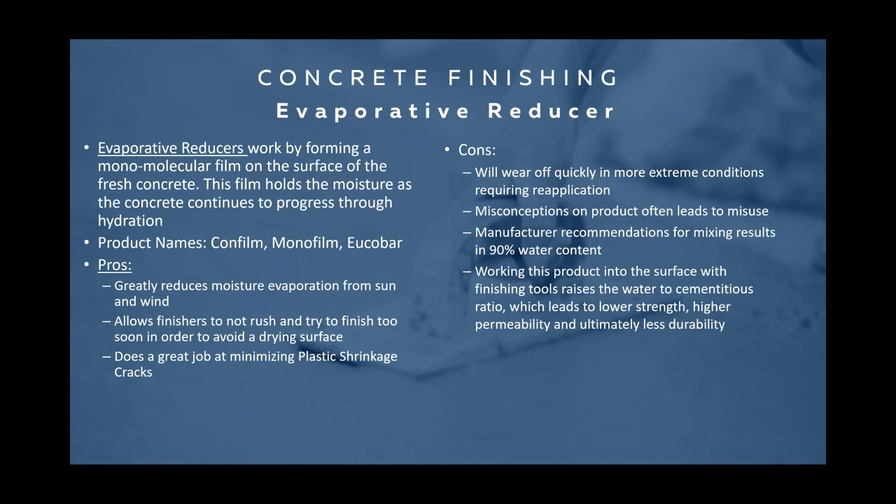If you follow the mixing instructions, it's 90% water, 10% active ingredient. And if you put it on the surface and then work it in with any of your tools, you're changing the water cement ratio of the surface of the concrete - you're going to increase the water cement ratio, which has an inverse effect on strength. So your strength goes down, your durability ultimately goes down, your permeability goes up. It just makes the surface a lot weaker than anything that may be a quarter inch below it.

So Day One, for instance, is a nano silica product that will actually work its way into the crystalline growth areas of your cement that's hydrating, and it'll create more calcium silicate hydrate. So you're creating more density, more strength, less permeability. You can use it almost like it's an evaporative reducer and it's safe to work in, or you can use it in greater concentration and actually use it as a performance improver.

The cons on this particular product - it definitely is expensive. There might be a little bit of sticker shock, but you also have to consider that you're going to get something out of using this. This is going to either give you some good insurance to avoid early deterioration, or it might be something you can leverage to actually improve the performance of whatever concrete you generally use.